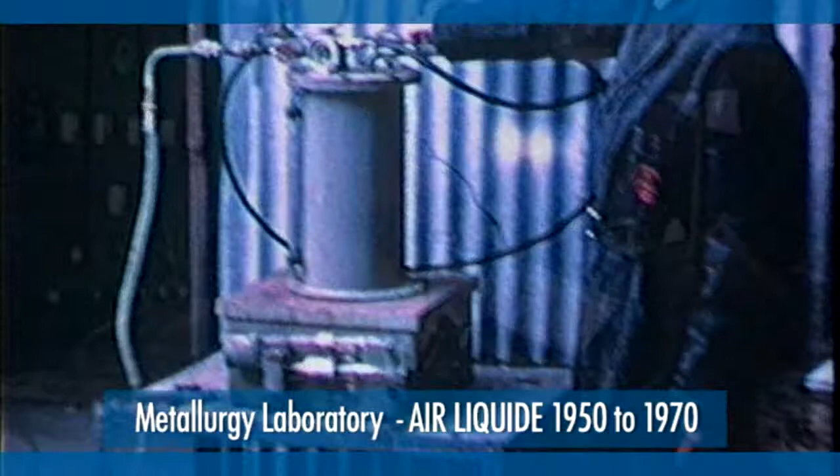In the last 50 years, industrial gases, and especially air gases such as oxygen, nitrogen, argon, and hydrogen, played a major role in the development of new metallurgical processes. Air Liquide pioneered the importance of developing technologies for the use of industrial gases in steelmaking.

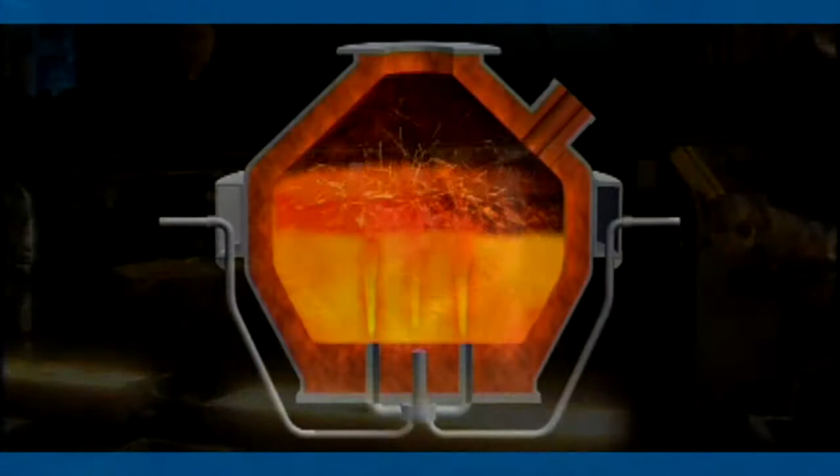In the 1950s, the development of the OBM process was made possible by a tubing system to enable oxygen injection at the bottom of the steelmaking converter. This breakthrough technology was invented by two Canadian engineers working at Air Liquide, Guy Savard and Robert Lée.

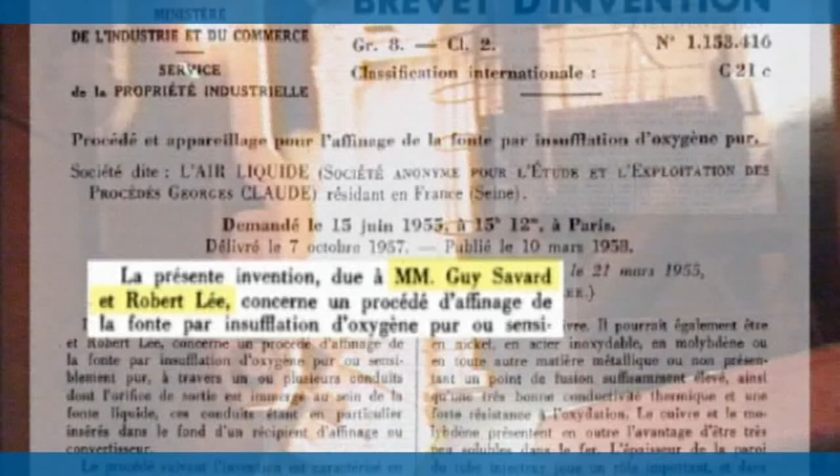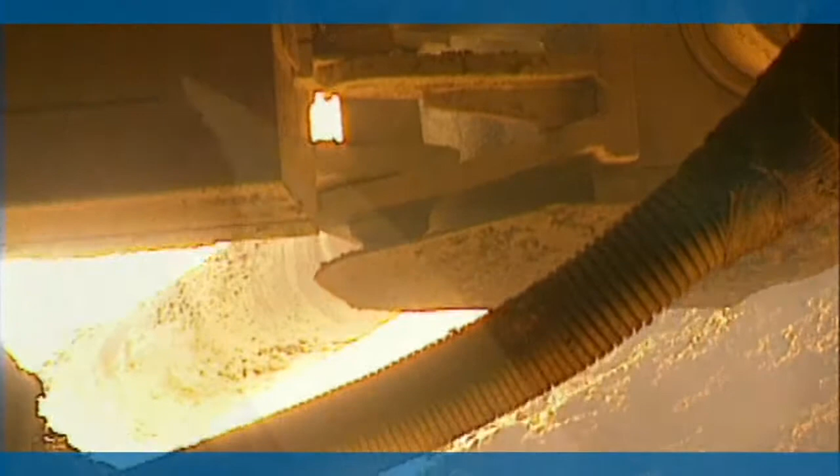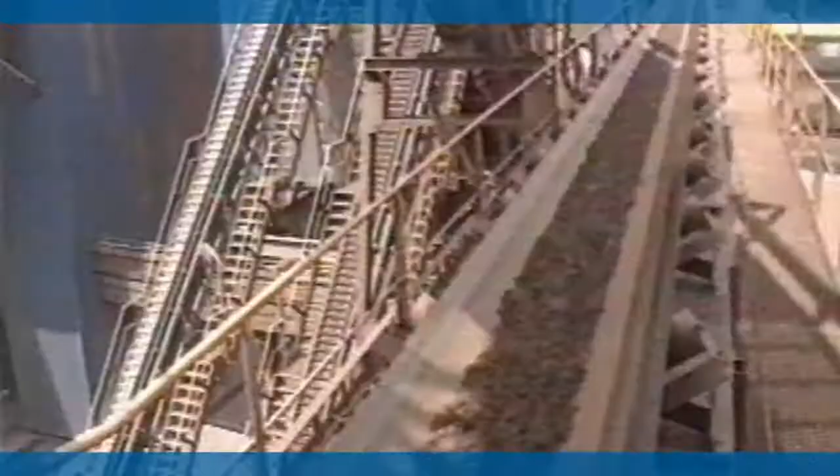The first trials of inert gas injection, such as nitrogen and argon, through molten metal, gave birth to the Gazal process. This technology is still used today in many foundries for the desulfurization of cast iron or the refining of aluminium. In the 1970s and 80s, the explosion of energy prices encouraged the development of oxygen-based combustion technologies to reduce the consumption of energy, while improving productivity and reducing the volume of fumes to be treated.

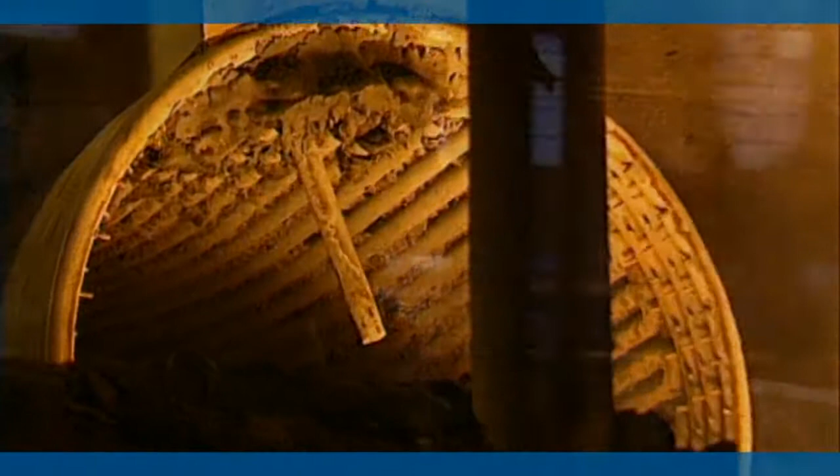Air Liquide worked in collaboration with the industry, steelmakers, foundries, producers of aluminium and recycled metals, to develop special oxygen burners and combustion processes.

An integral part of our strategy as a major industrial gas supplier is the collaboration with our customers for the development of technologies for their industrial processes. To do this effectively, we must understand the complexities of their operations.

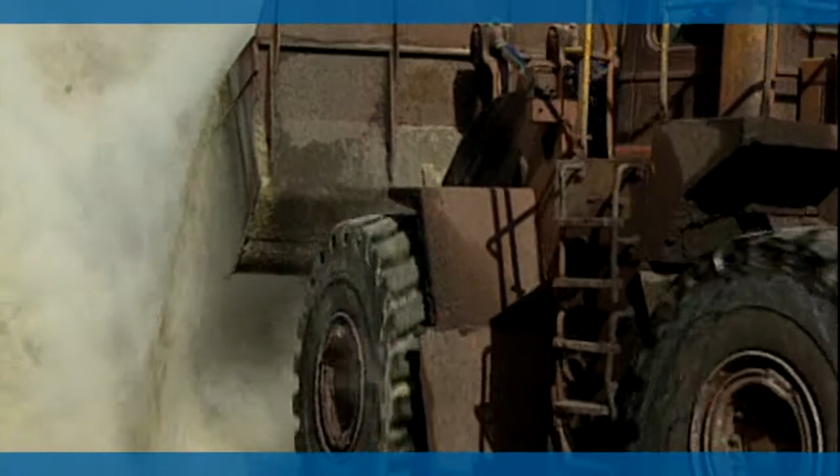Common goals we have with our customers include continuously improving their production efficiency to overcome serious threats created by world competition, adapting processes to the fluctuating prices of energy and raw materials, being cognizant and respectful of new regulations as they emerge, and finally, above all, aiming at more sales growth of new products.

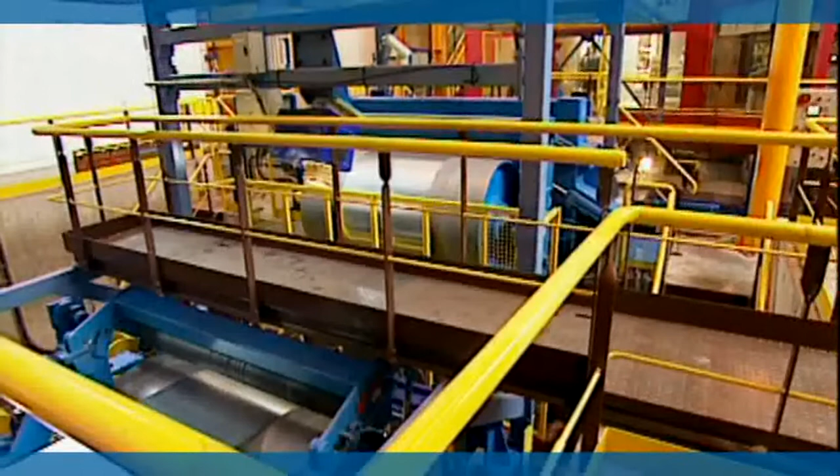Each one of these elements is stimulating the growth of our portfolio of industrial gases technologies. Here are some examples illustrating this activity in research and development.

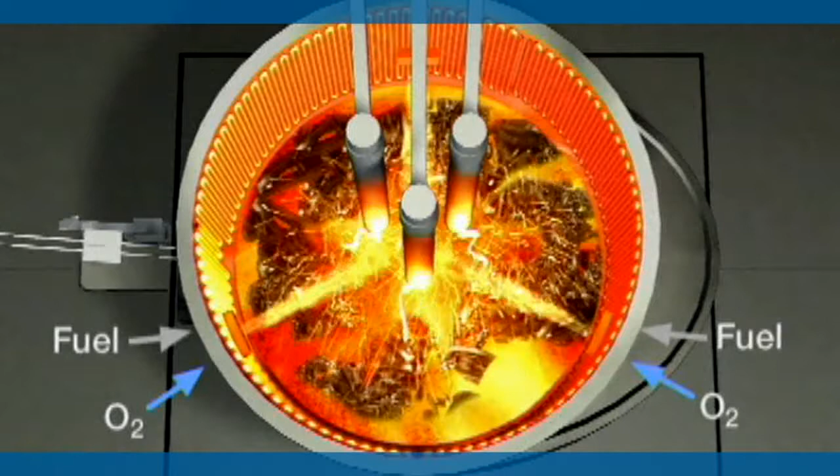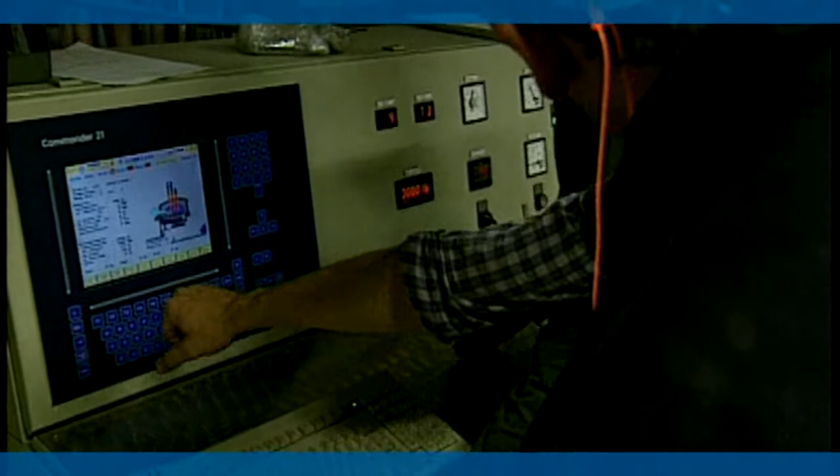Development of supersonic lances for safely and efficiently injecting large quantities of oxygen into electric steel furnaces and converters. Development of low NOx oxygen burners for reheating steel before it is sent to be rolled. Development of in-situ optical devices for the quality control of atmosphere in aluminium and steel smelting furnaces. And finally, the development of helium-based gas mixtures used for the fast cooling of motor transmissions for the car industry.

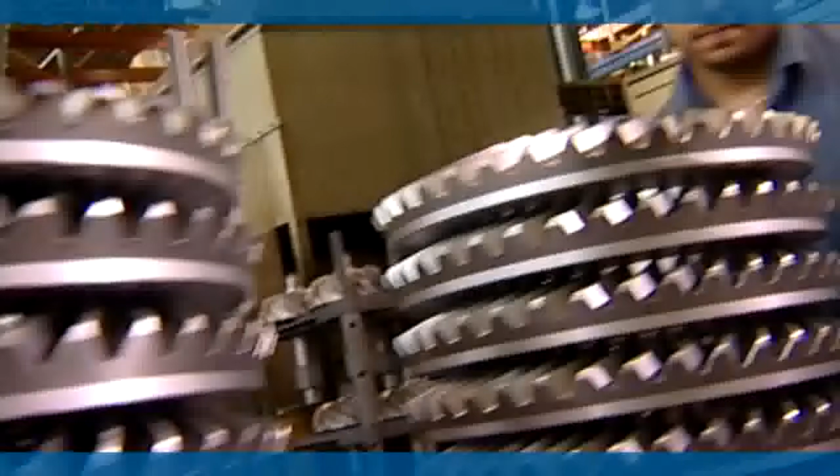And now I would like to invite you to discover all our activities here at the Research Center and at our customer sites.

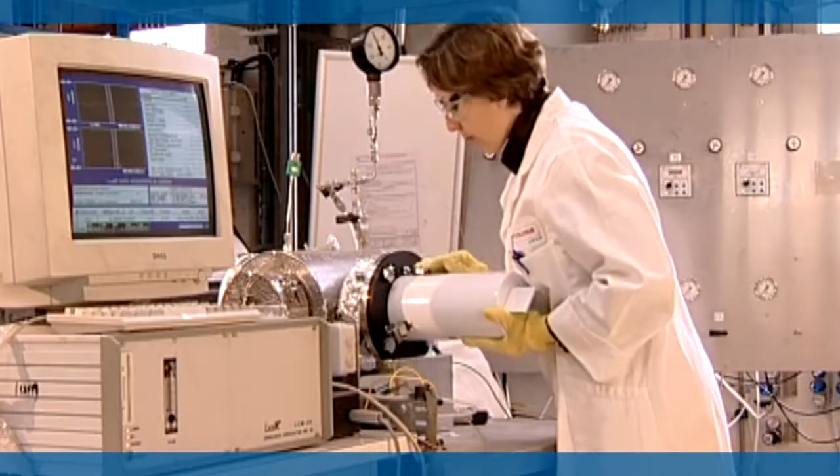The tunable diode laser is an instrument which allows us to measure gas composition. To do that, it uses the gas property which consists in absorbing a certain number of wavelengths. The advantage of this apparatus is to carry out in-situ measurements in real time and almost without maintenance.

The optical signal is sent by an optical fiber and is then recovered by a receiver, which transmits the electric signal by a coaxial cable. Several gas species are measurable by the laser diode, in particular the gases which absorb in the near infrared. CO, CO2, and water vapor at low temperature are some examples.

Several research studies are being conducted at Air Liquide on process optimization and atmosphere control developments. In terms of process control, we're developing a diode laser-based measurement system for the electric arc furnace, where we measure CO and CO2 to optimize the oxygen injections in a post-combustion process to maximize total power input to the steelmaking process.

After steel, aluminium is the second most used metal. Today, a third of this aluminium produced comes from the recycling of products. One of the most used methods is the rotary furnace. These types of furnaces are often equipped with oxy-combustion burners in order to maximize productivity and energy savings.

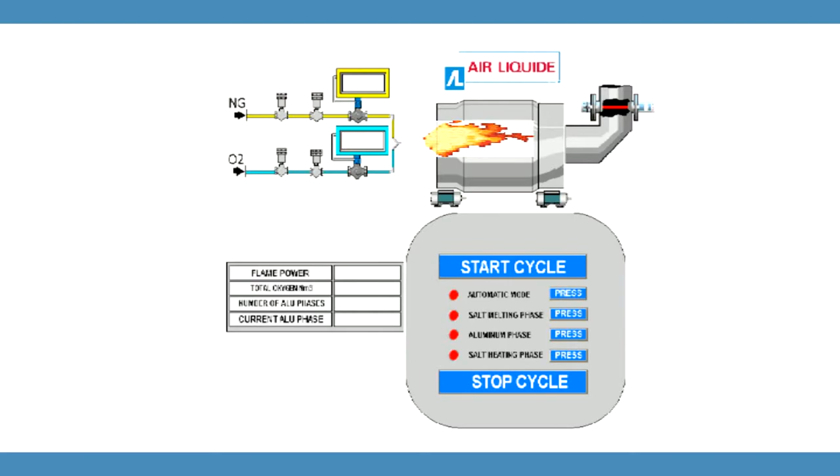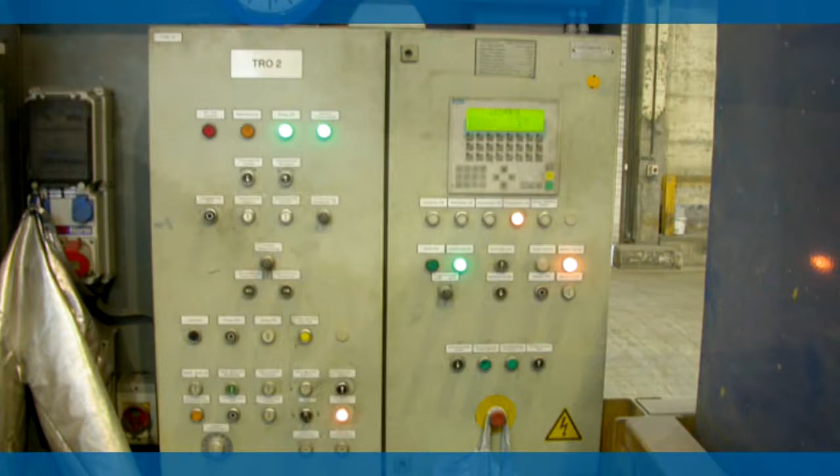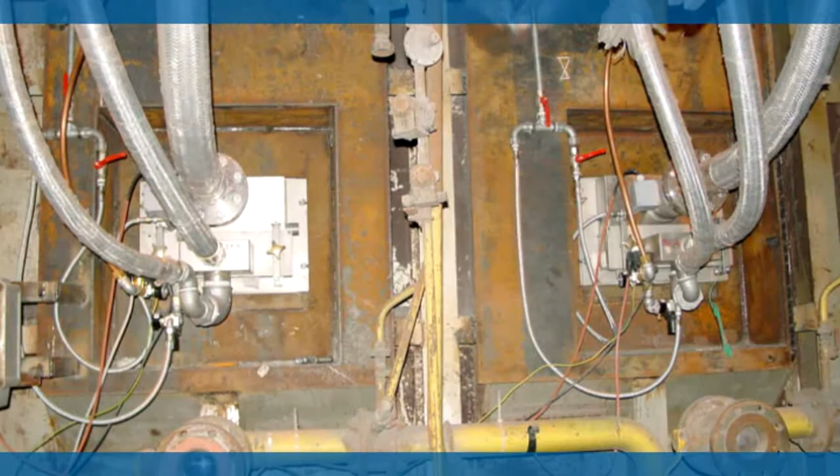The information sent by the sensors is then transmitted to a programmable logic controller, which calculates in real time the optimal furnace operating conditions. Thanks to this control system, the oxidation of aluminium is strongly reduced, its productivity is improved, and the oxygen and natural gas consumption are reduced as well. The industrial validation process showed savings up to 20 euros per ton of aluminium made.

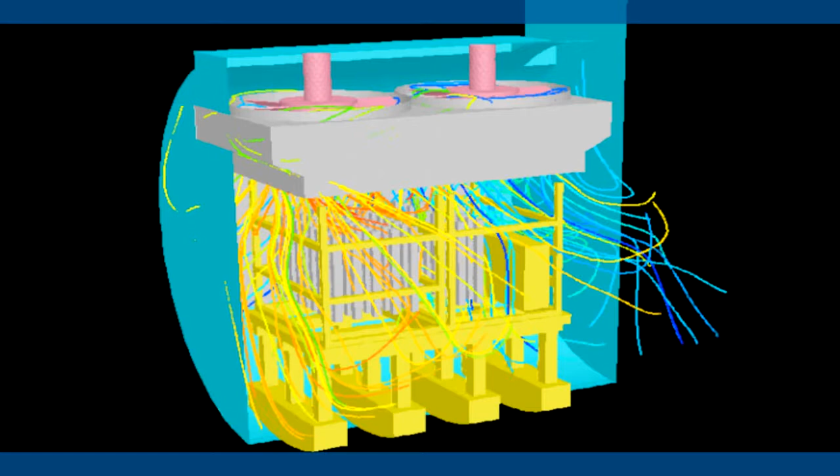A significant part of our research activities requires the essential use of modeling. Our researchers in fluid mechanics develop models which allow us to consider various parameters, such as temperature, pressure, concentration, and different geometries, to evaluate their impact. We save precious time and money by avoiding difficult and often expensive experimental campaigns.

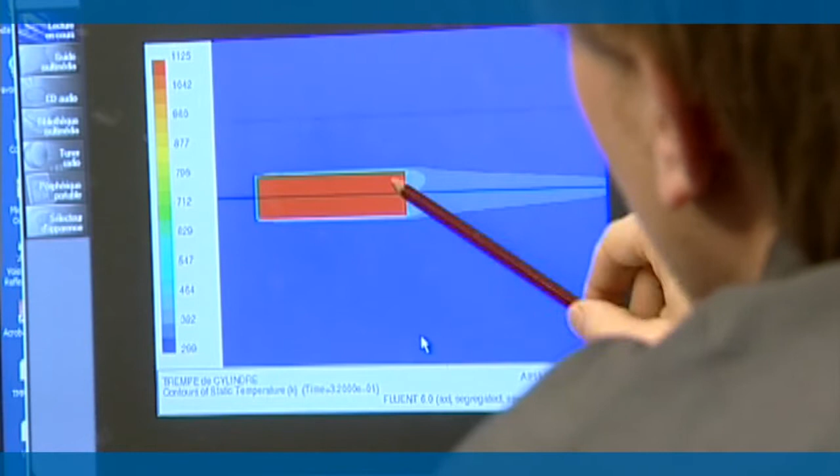Once the operational parameters of the prototype or the process are defined by the modeling stage, the second step concerns validation on a pilot scale, which can be carried out either in the research center or at the customer site. This stage is critical to the model's validation and to the readjustment of all the preset parameters.

We're here in an electric steelworks, where steel is produced from recycled scrap. The first stage in steel production is the arc furnace, where this scrap is melted.

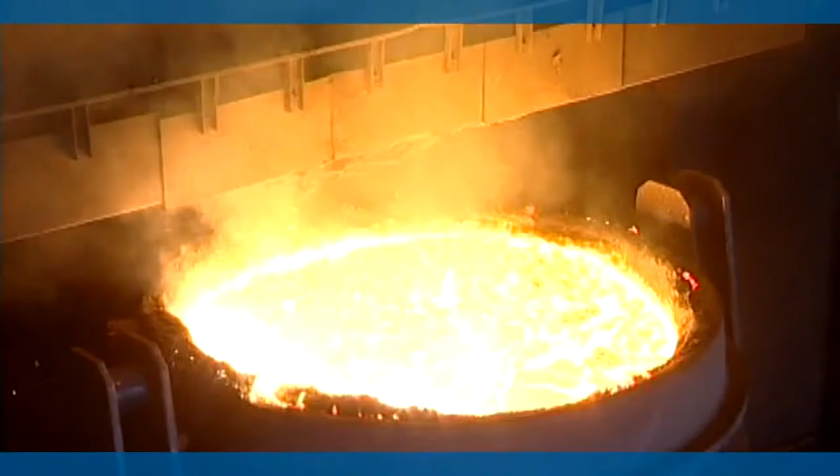Our concern at Air Liquide is not only to optimize oxygen injection in the furnace, but also to optimize the injections of coal and natural gas by proposing innovative solutions. These consist of regulating injection of coal, oxygen, and natural gas by a continuous fume control system that uses information from a diode laser. We're able to improve its output by ensuring a better heat distribution within the furnace. An improved combustion process offers a better fume emission control system.

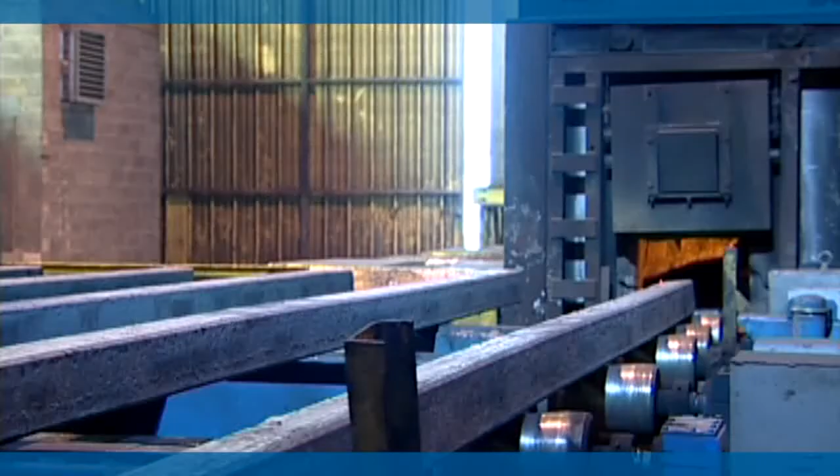Direct flame reheating furnaces equipped with gas or fuel burners and preheated air are used to heat steel up to the rolling state temperature. The steel pieces are slowly heated up while they continuously move through the reheat furnace.

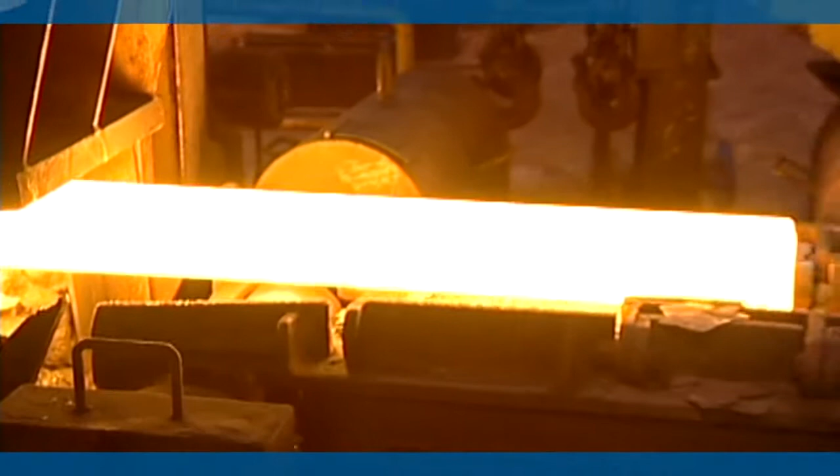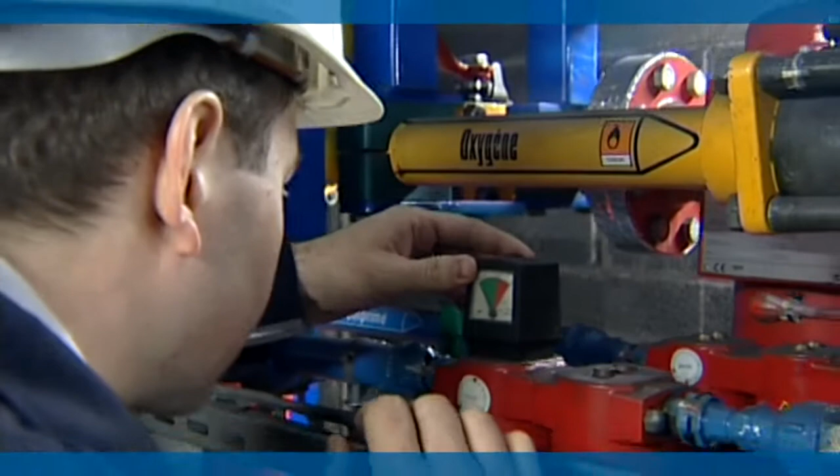These furnaces, often of old designs, are a bottleneck for the whole production line. Air Liquide recently developed an innovative oxy-combustion solution called Alrol. This technology allows us to increase the output of the furnaces, depending on their requirements.

The Alrol solution consists of adding oxygen burners to the existing furnaces to increase the furnace performance. Most of the work is performed during normal furnace operations, with a minimal shutdown for final installation. The flames generated by the burners significantly increase the thermal transfer to the load. Therefore, the reheating rate is largely accelerated.

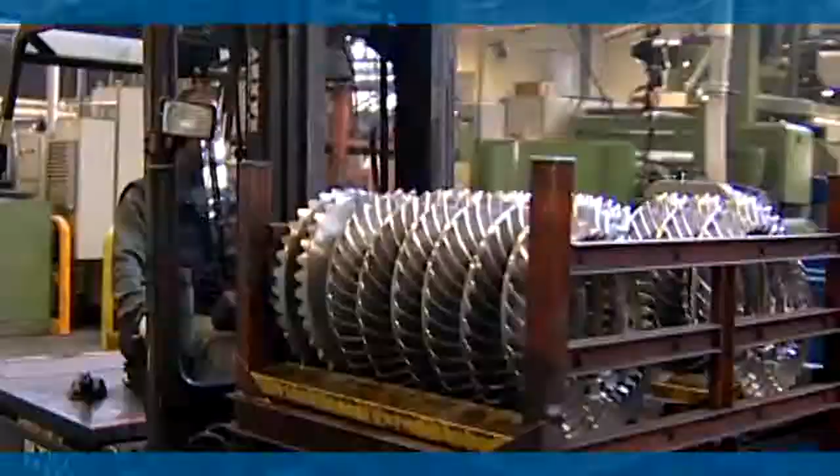We're here on the site of a transmission manufacturer for large trucks, which uses metal heat treatment for the production of its parts. Air Liquide offers customers its expertise in the field of heat treatments. The heat treatment step is essential in guaranteeing a satisfactorily long shelf life for these transmissions. These treatments depend on the gas exchange process between the produced parts and the gases supplied by Air Liquide.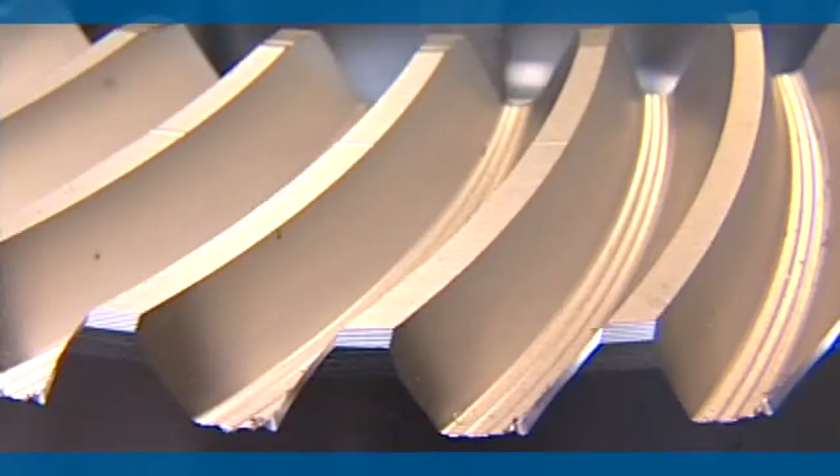The traditional heat treatment processes require important technological developments to comply with the new environmental regulations. Thanks to its research and development, Air Liquide is actively pursuing the development of new technologies, such as steel hardening by quick cooling of steel parts with gas, which allows us to effectively replace traditional processes of steel hardening in oil baths.

As you've noticed, our activities in research and development are dictated by the evolution of our markets and thus our customers' expectations. It is then critical to work in partnership with our customers, creating common interest R&D teams while working on the same projects, to define technological action plans and their timely completion.

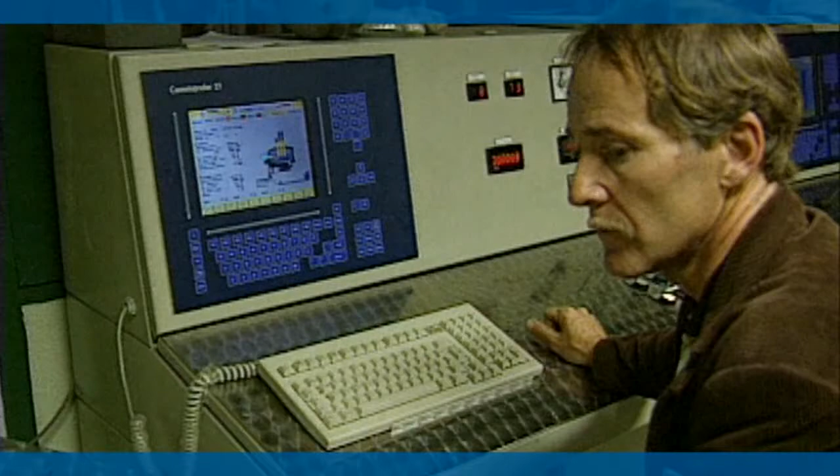By way of these partnerships, we offer our expertise in gas technologies, from gas production, online analysis, to continuous processes of our customers.

The Primary Metals and Material Processing Group of the Claude Delorme Research Center conducts developments aimed at optimizing the environment and the performance of industrial processes involving gas-metal interfaces.

In our view, the future requires a strong Air Liquide participation in the European iron and steel industry research effort engaged in the development of low CO2 emission processes for primary steel making.

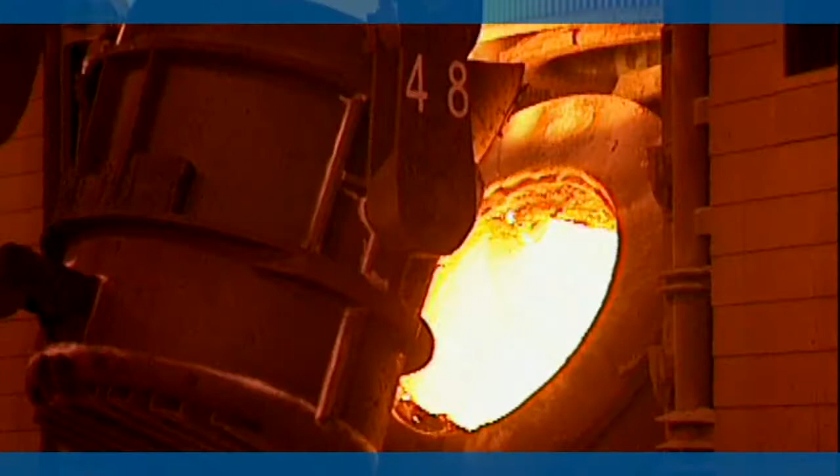Within this framework, our residual gas separation units will allow the sequestration of carbon dioxide or its recycling for other applications. Our developments also concern emerging technologies, such as plasmas for thin-layer deposits on metal surfaces, to add new functionalities.

These two examples show the large diversity of our project's portfolio. It is supported by an extensive expertise, by the international recognition of Air Liquide and its academic and industrial partners. This enables us to offer our customers cutting-edge technologies.